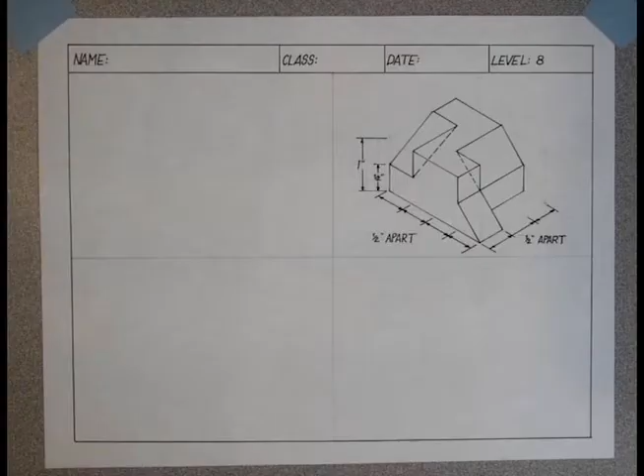Here we go. Let's take a look at the level 8 technical drawing. As you can see, it's fairly complicated. We are going to have at least 2 views with hidden geometry in them. Looking from the top, we're definitely going to see this kind of Z shape, although it's not going to look like a Z in the top view.

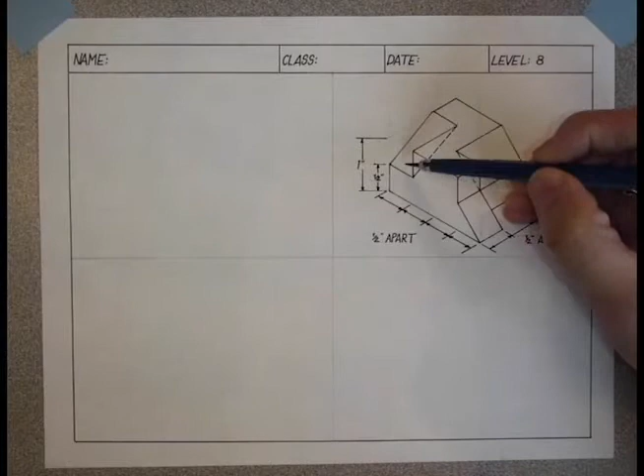We're going to see a rectangle here, we're going to see a rectangle here, and we're going to see a rectangle here. Because again, we're imagining looking down from the top in a straight line, and anything that light can hit as it comes down is going to be in that top view.

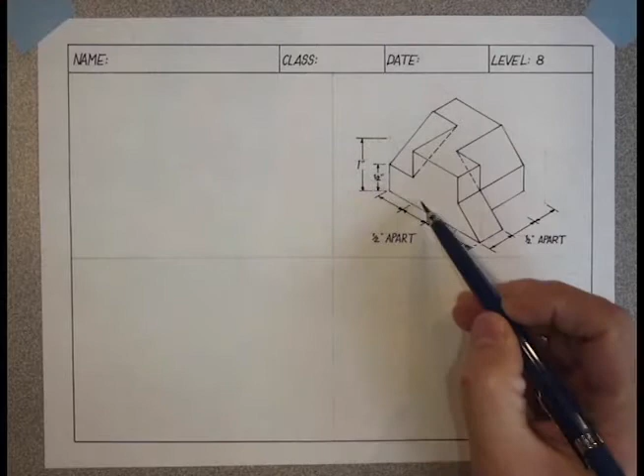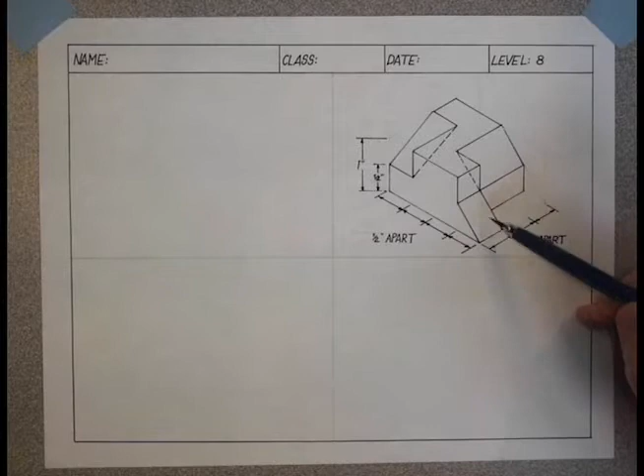Conversely, from the side view, we are going to see this interesting shape right here. We are going to see this, which may look like a rectangle, it may look like a square. And we're going to see some hidden geometry so that we can see this part of the object behind that front plane. From the front view, we are going to see this rectangle here, and we're going to see a number of other surfaces that are both hidden and exposed to us.

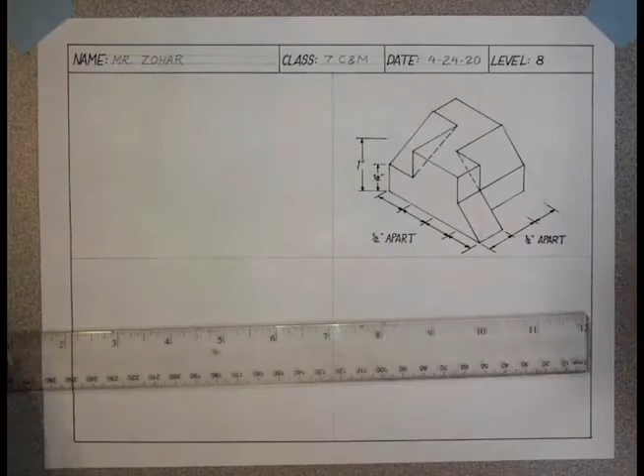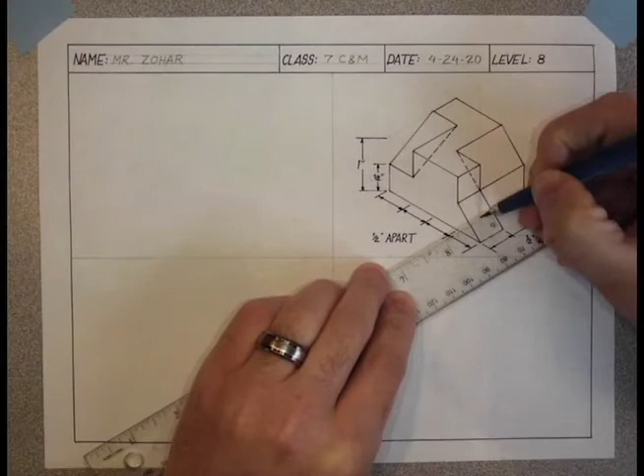First things first, name class date with guidelines all caps. Next thing we want to do is draw the footprint of the top view. We're also going to notice it's not going to be rectangular this time. There's going to be a part that we can't see. And what's more, in the isometric, there would be hidden geometry showing us that this part continues to there, and that that part continues this way, and that this part continues this way.

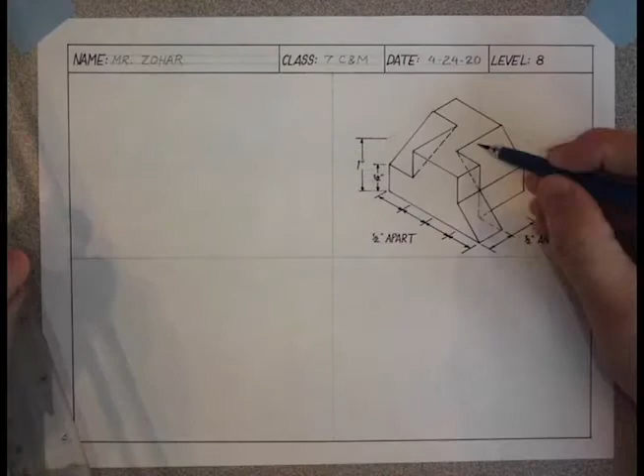But the reason it's not in the isometric view is because that hidden geometry is not going to show up in either the top, side, or front views. The isometric contains only the hidden geometry that we need to know about in order to do these 3 drawings. So let's start with the top view. Going to create a nice parallel horizontal line for the base of that view. And we're going to want to make sure that we have measured it so that all of these measurements show us that they're 1/2 inch apart.

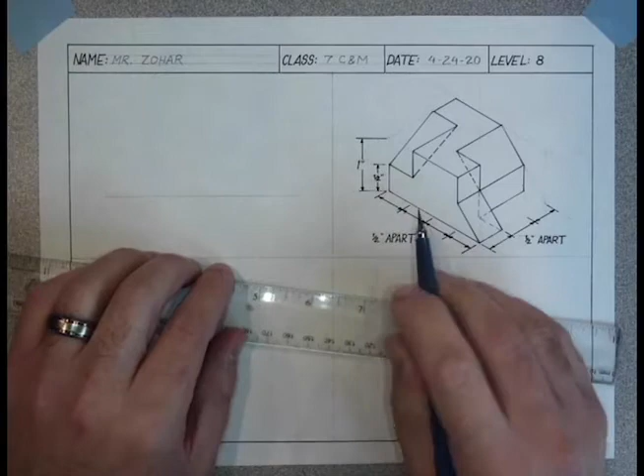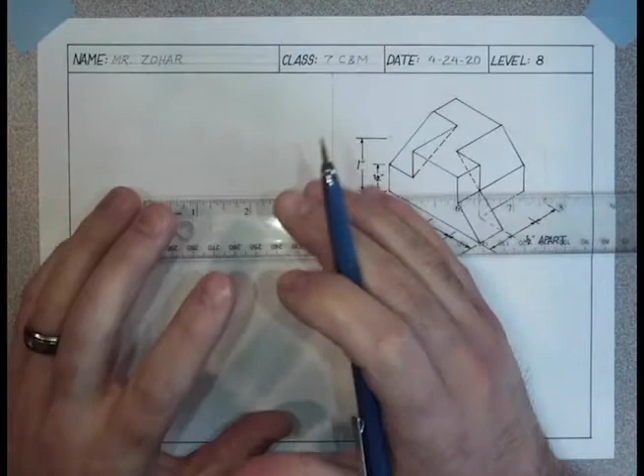So what is the overall length of the top view? Well, we're going to have to surmise that based on the minimum amount of information that was given here. 1, 2, 3, 4 times 1/2 inch is 2 inches. We can also take our ruler and actually measure this, although I'm not sure if in the packet that you have, if you print it out, whether it will actually print to that scale. So I've gone ahead and made marks every 1/2 inch for 2 inches.

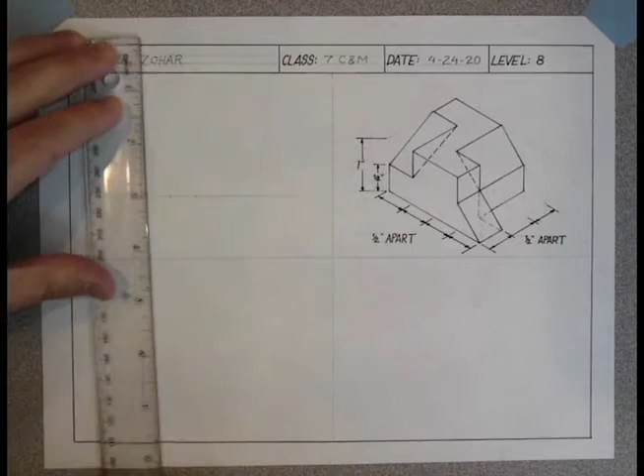Next, I'm going to check out the depth of the top view, which is 1.5 inches, because we have 3 segments 1/2 inch apart. This is basic math. And we can go ahead and drop that down into the side view. And we'll do the same thing here. Eyeballing my parallelness, but you can always measure it yourself. And once again, measuring those 3 1/2 inch segments.

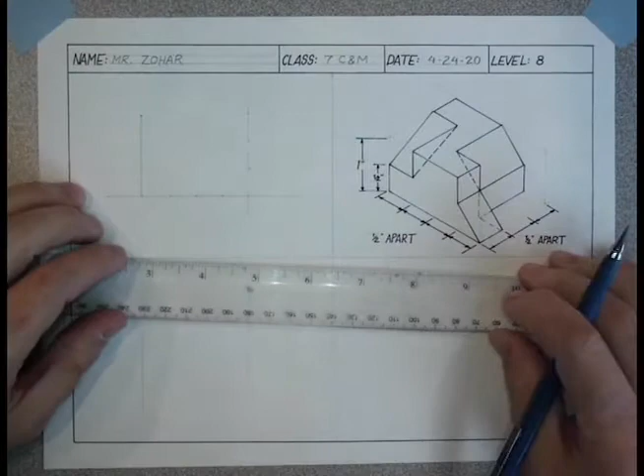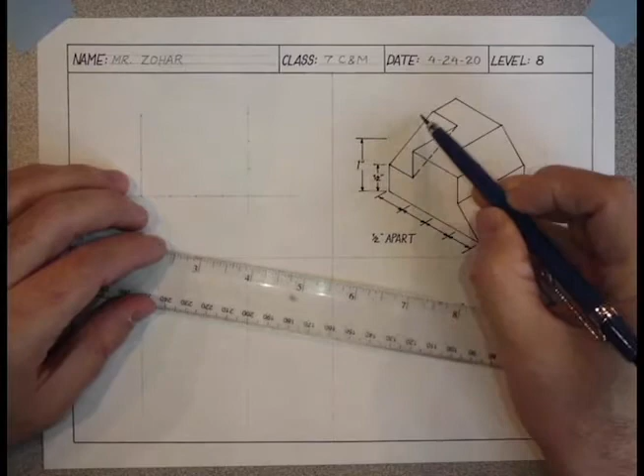Great. Now I can start to figure out what is the geometry of that top view. I know that this part here sticks out 1/2 inch, and then it's going to come in 1/2 inch, and then it's going to go up a whole inch. That's going to be a straight edge to the back corner, and then this is going to come up to the front corner in a straight line. So we're going to sort of see a 1.5 inch square with a little 1/2 inch part sticking off.

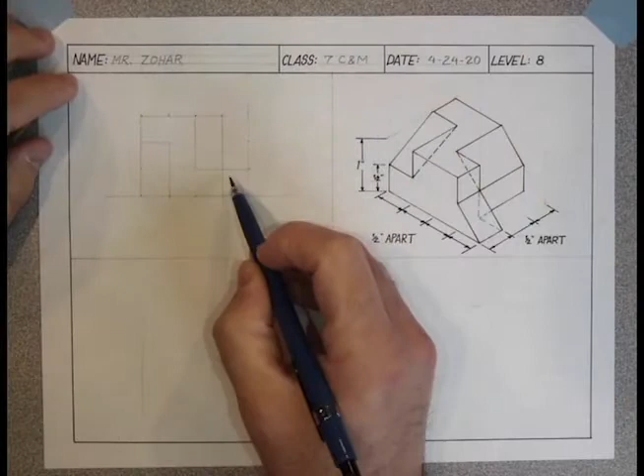From the top, we can see that we've got these 2 angled parts like that, and this Z shape that we found earlier, plus this little sloped part on the front. We're going to drop all these lines down, of course. First, let's just measure along the bottom to make sure that they all line up right, because we don't want to make mistakes.

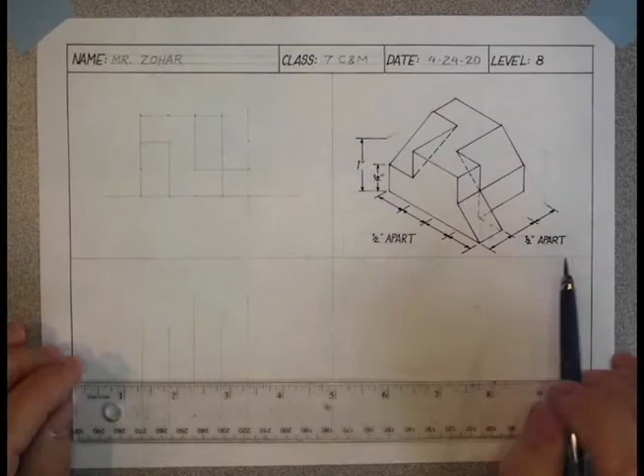Next, we're going to draw the baseline of the side view, and it's going to carry us into the front view. Straight across like that. Next, we do our vertical measurements. We need a 1/2 inch, and we need an inch from the bottom. Nice and simple. Let's bring it over to the next place where we have an intersection, which is here, and we can measure those across.

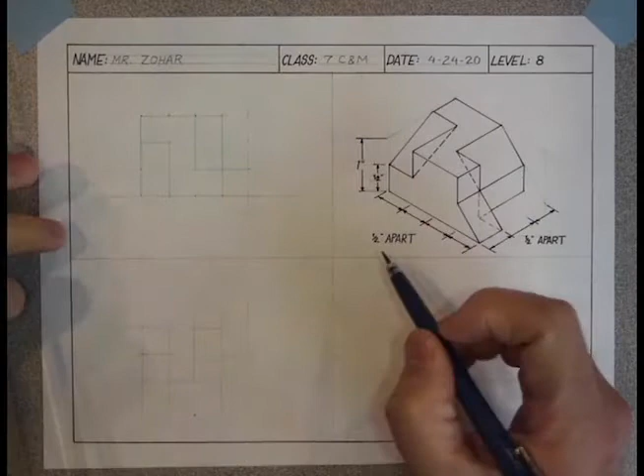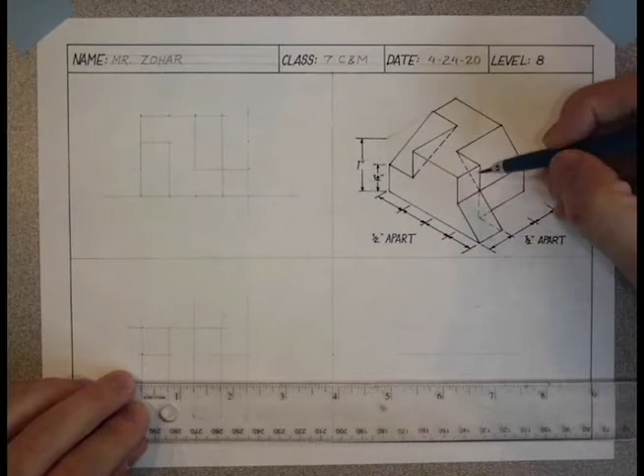Okay, so now we have to look at the side view, and I just noticed we are going to need this hidden geometry piece right here. So let's go ahead and do the side view in darkly so that we can see what we're keeping. We can also see where some patterns start to emerge in terms of where slopes are occurring. So here's this one. That's right here. And then this one back here is hidden. Just like that.

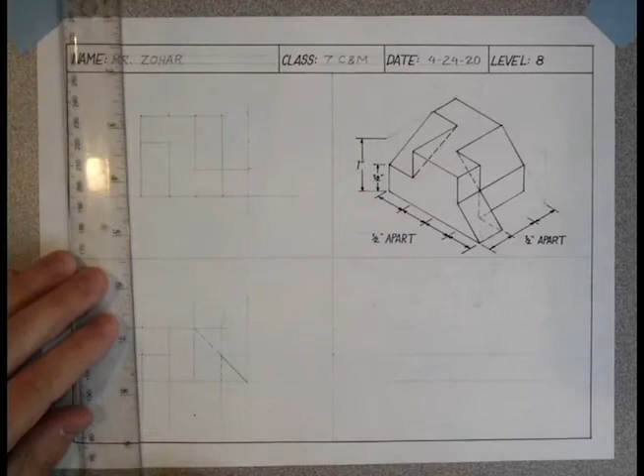Next, we want to make sure we've got this piece of hidden geometry. And I think that's everything that's hidden in the side view. So now we're going to pencil everything in more darkly so we know what we're keeping. While I'm penciling things in darkly, I'm going to go ahead and do the top view as well.

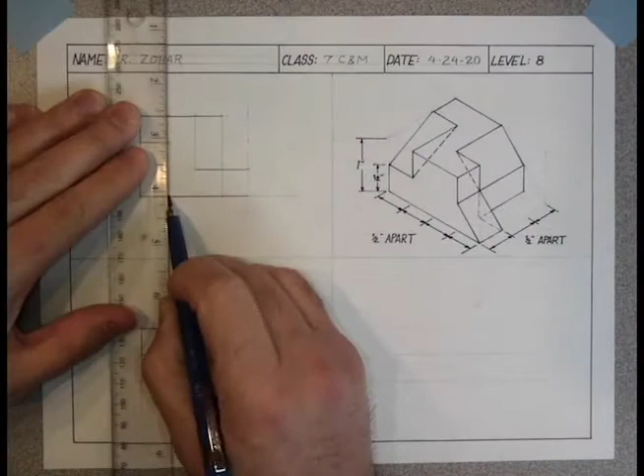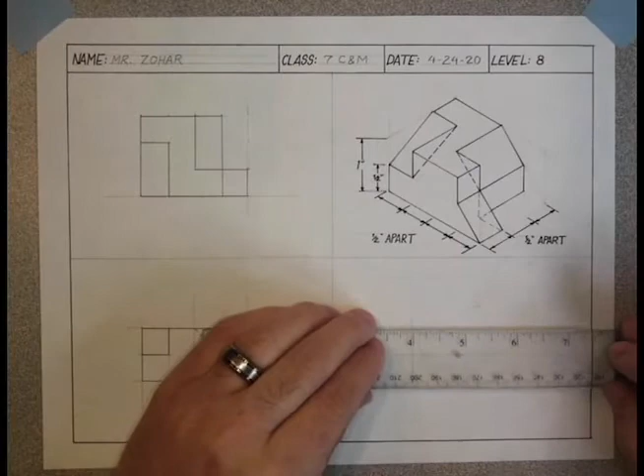And now for the front view. We see that it's 1.5 inches wide again. We've got all the measurements here, we just have to copy them over. The tricky part might be finding parallel lines, and for that you just have to kind of eyeball the edge of your ruler against another vertical. Once you've got one, you can measure the rest. Probably safer.

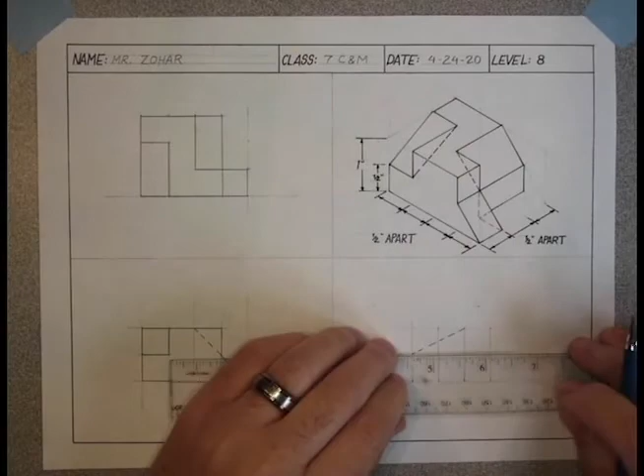Remember, in the front view there is hidden geometry that goes from here to here, which is a more shallow angle than we're used to. And I'm going to go ahead and do that in darkly. And then we can fill in the rest. Using my eraser now, I'm going to go ahead and clean up my drawing a little bit. Next, labeling and dimensioning.

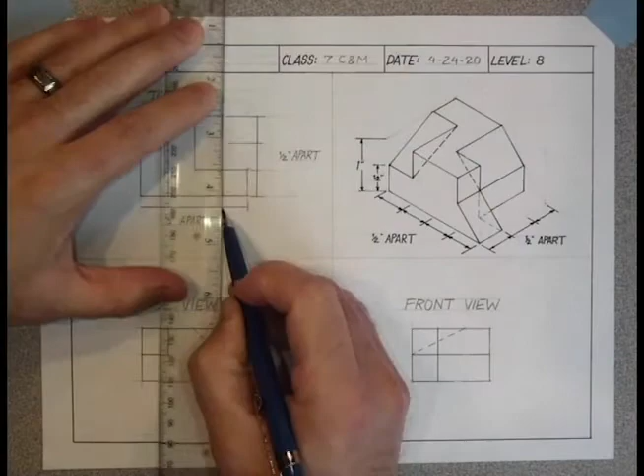There you go. Please note that you should always try to make your dimensions as consistent as possible with the isometric drawing, because that way everything is consistent and you can sort of verify that all your dimensions are correct according to what I gave you.

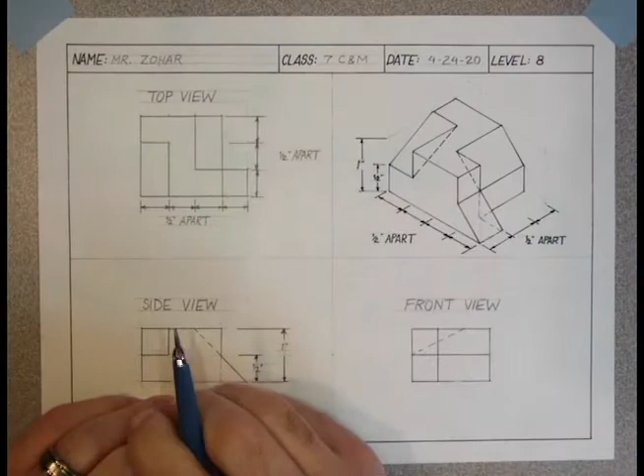Please remember that this piece of hidden geometry right here needs to be included in the side view. If you skip that, you will be leaving your viewer a little bit confused about what's happening back here when they're looking at it from the side, because remember, they're not getting this piece of information from this view or from this view necessarily. Something else could be going on here that they're not seeing. So you want to make sure that you include that dashed line that goes from a 1/2 inch up to the bottom in the side view.